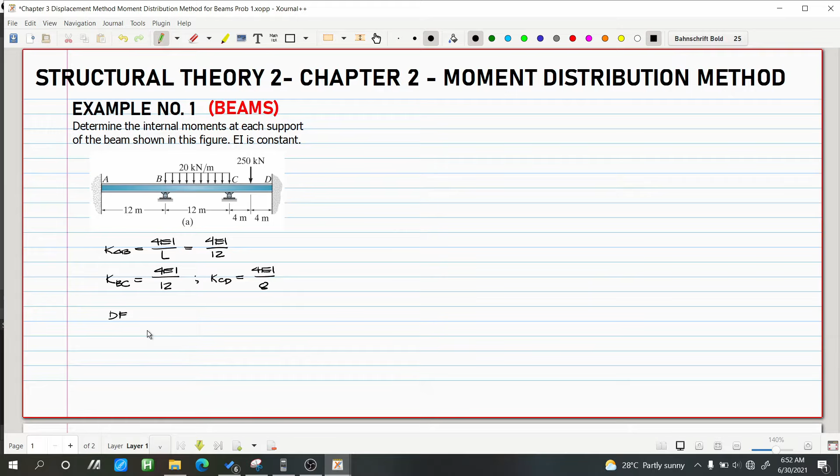Then, yung isa, BC. 4EI over 12 din. Then, last, K CD. K CD is equal to 4EI over 8. Okay, so isolve naman natin yung distribution factor. And alam naman natin ang distribution factor ng AB and DC is equivalent to 0, kasi fix yung ating support. DC is equivalent to 0.

Kung naalala ninyo, nag-0 to kasi ang ating DF AB is equivalent to K AB over infinite plus K BA. So since infinite to, mag-equivalent to sa 0, kung naalala ninyo doon sa ating introduction sa analysis ng beam.

So, solve naman natin yung DF or distribution factor para sa BA and BC and CB and CD. So, DF BA is equivalent to, ano yung mga member stiffness na gamitin natin? So, DF BA, for member AB: K AB over yung lahat ng member stiffness na nasa joint B, that is member AB and member BC. So, K AB plus K BC. Kung napapansin nyo rito, 4EI over 12 and ito rin is 4EI over 12. So, magka-cancel out lahat ng 4EI. Ilagay na lang natin yung 1 over L. So, this is 1 over 12 over 1 over 12 plus 1 over 12.

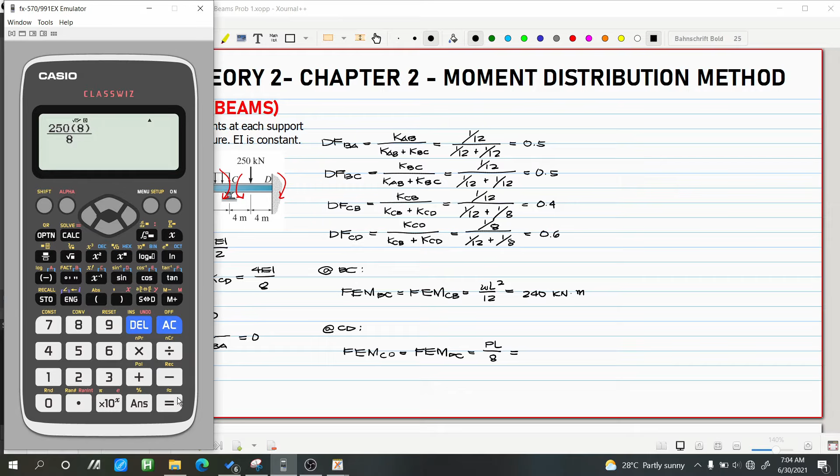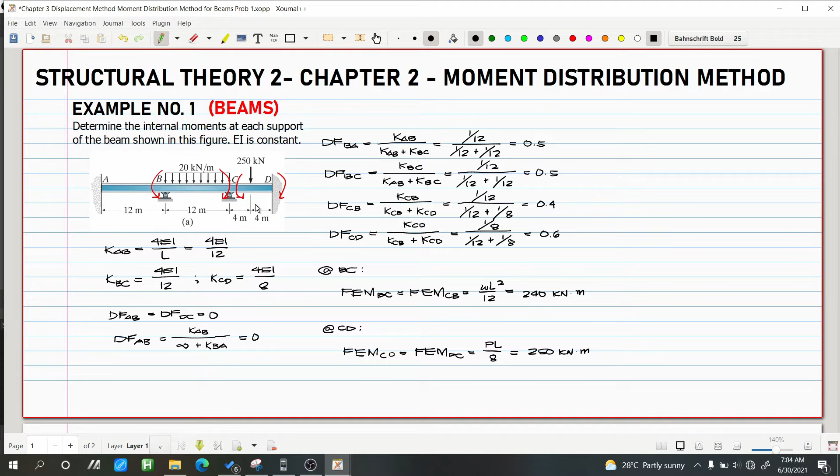250. 250 kilonewton meter. Okay, so counterclockwise and clockwise. So, yan na. Yan yung mga gagamitin natin para sa table natin. Okay? Ayan. So, ito na yung table natin.

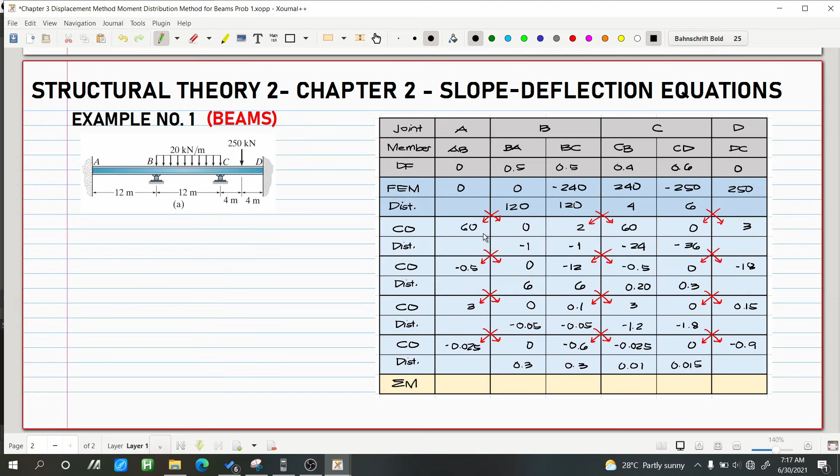Kung napansin nyo, yung distributed moment natin is maliit na lang, 0.3 and 0.01. So pwede na tayong mag-end ng ating iteration. Iteration ang tawag dyan sa kada row natin. Ngayon, i-add na natin para sa mga moment. Sa AB, 60 plus negative 0.5 plus 3 plus negative 0.025. So ito ay positive 62.475. Next, para sa BA, 120 minus 1 plus 6 minus 0.05 plus 0.3. So, this is 125.25.

125.25. Since B to, kailangan equal lang yung moment natin para sa BA and BC para mag-equilibrium tayo. Kung ito positive, dapat ito naman is negative. So, negative 240 plus 120 plus 2 minus 1 minus 12 plus 6 plus 0.1 minus 0.05 minus 0.6 plus 0.3. So, negative 125.25. Tumama tayo sa B. Next, para naman sa C. So, 240 plus 4.

Huwag nyo isasama yung DF. Distribution factor yan. Ang pinagsama-sama lang natin is lahat ng moment. Ito yung FEM natin, fixed end moment. Yung distribute is distributed and balanced moment. Yung CO is also a moment, carryover moment. So ito yung pinagsama-sama natin, lahat ng nasa shade ng blue. So, plus 4 plus 60 minus 24 minus 0.5 plus 0.20 plus 3 minus 1.2 minus 0.025 plus 0.01. So, this is 281.485.